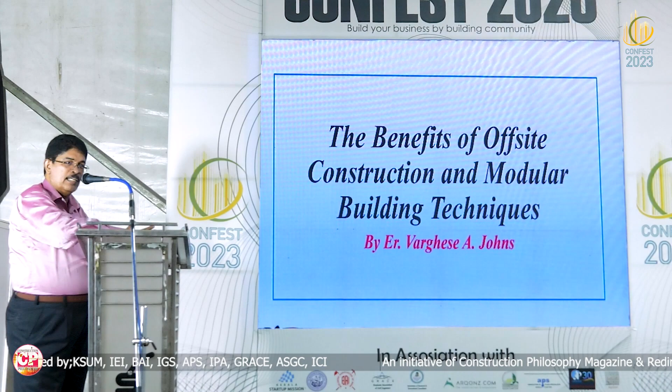Today I am really happy to be here and part of this presentation, this event. The topic I'm going to present is prefab, precast and pre-engineered building, titled the benefits of off-site construction and modular building techniques. We are all aware of the current status of prefab, precast, pre-engineered and modular structures nowadays actually catching up in the market, and it is going to be the future as such.

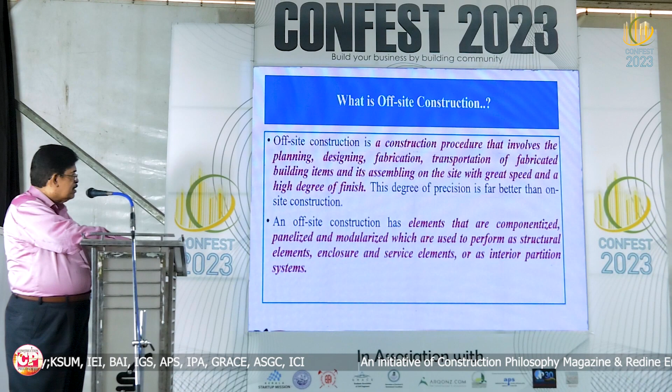So to start with the definition, off-site construction is a construction procedure that involves planning, designing, fabrication, transportation of fabricated building items, and assembling on site with great speed and a high degree of finish. The degree of precision is better than on-site construction. Off-site construction has elements that are componentized, panelized and modularized, which are used to perform as structural elements, enclosure and service elements, or as an interior partition system.

This is basically what all precast, prefab, pre-engineered and modular construction is about nowadays.

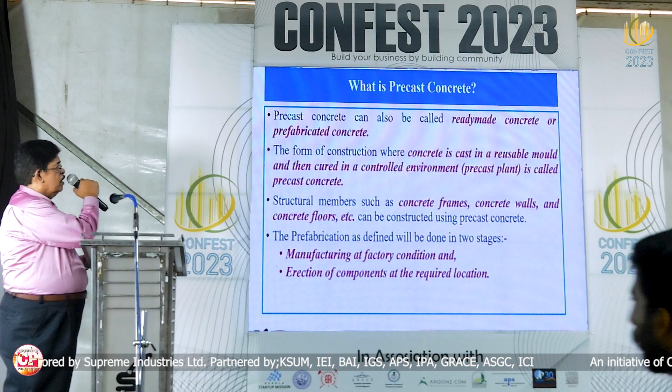So the most important component of this off-site construction is precast concrete. Precast concrete can be called either ready-made concrete or prefabricated concrete. The form of construction is cast in a reusable mold and then cured in a controlled environment. It is called precast concrete because it is a repetitive kind of construction procedure that we do for a large number of buildings or structures or facilities.

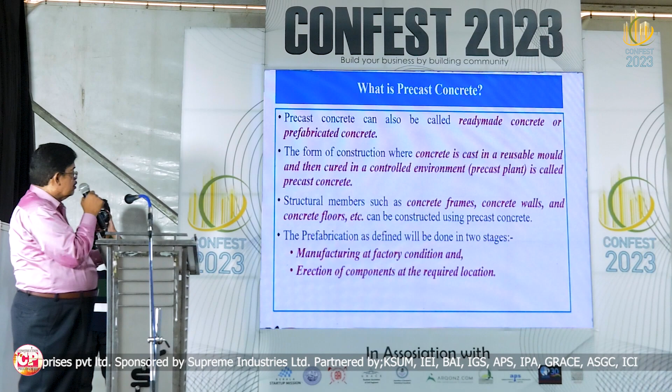Structural members such as concrete frames, concrete walls and concrete floors can be constructed using precast concrete. Prefabrication is defined as done in 2 stages: manufacturing at factory condition, and erection of components at the required location. So we can just have a look at when this precast concrete was actually invented.

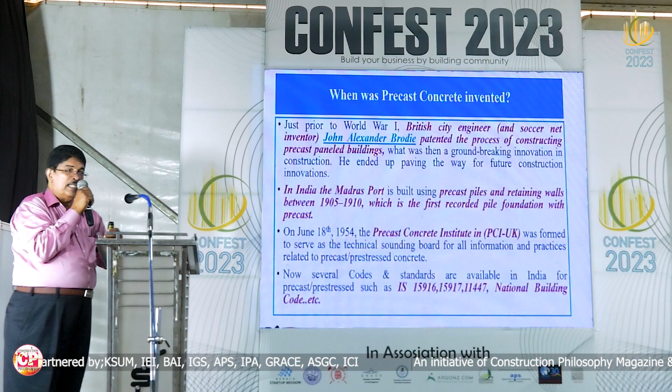It was during World War I. After that, a British city engineer, John Alexander Brodie, patented the process of constructing precast paneling buildings, because war is always actually an initiative to develop engineering and development, because by force we used to have engineering advancement. So they wanted to house the soldiers at the site of the war zones. They had to develop something like a precast building that could be immediately constructed, like what we have sitting here in 2 days - this is constructed and we are housed so fast.

This is the advantage of having a precast or prefab construction methodology.

Then we will go back to the history in India, when it started. The first time, at Madras Port, precast piles and retaining walls were used between 1905 and 1910, which is the first recorded pile foundation with precast in India. During the time of the British, they actually did this Madras Port using precast piles.

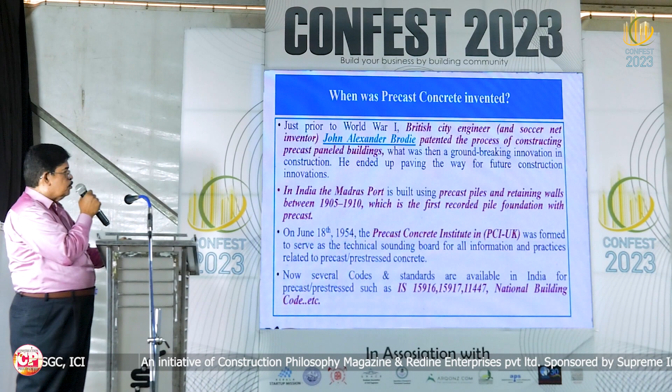Then they formulated the Precast Concrete Institute, PCI UK. Over a period of time, we have also developed precast construction - not that early, but recently we have established precast and pre-stressed codes and standards for design and implementation. You can see codes like IS 15916, 15917, 11447, and the National Building Code of India, which explain and give the requirements for precast construction and design.

What are the applications of precast and prefabricated systems today? It is being used in most projects nowadays, partially or fully. Precast pavements, septic tanks, drainage - this is all what we see daily. Somewhere you will see precast when you go to a construction site or any part of construction.

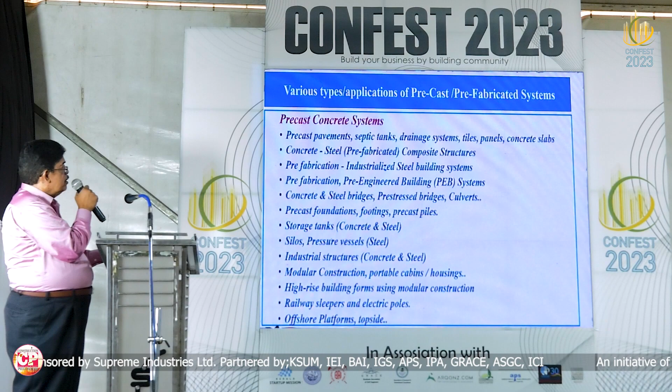Prefabrication, industrial steel buildings, and pre-engineered building PEB systems, steel bridges, pre-stressed bridges, culverts, precast foundations, footings, precast piles, storage tanks in concrete as well as steel, silos, pressure vessels, industrial structures, and so on. Modular construction, portable cabins, high-rise building forms using modular construction, railway sleepers and electric poles, and offshore platforms.

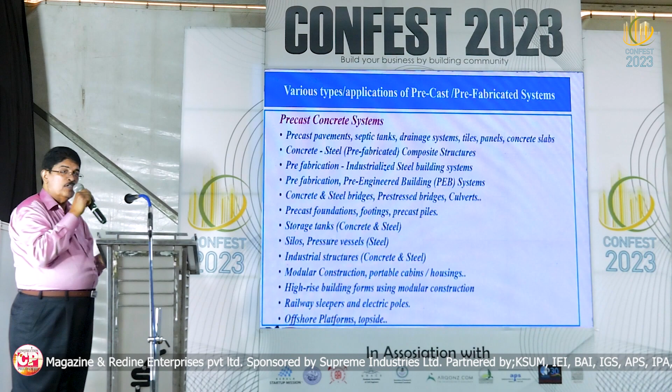Most of these applications are very big projects as well as very essential nowadays, since we need speed in construction and achieving the facility in operation, so we spend less money, more economical and optimized construction. In precast concrete highway and railway bridges, we have I-girders, pre-stressed reinforced concrete, steel plate girders and bridges, pre-stressed concrete segmental construction, pedestrian underpass, vehicle underpass.

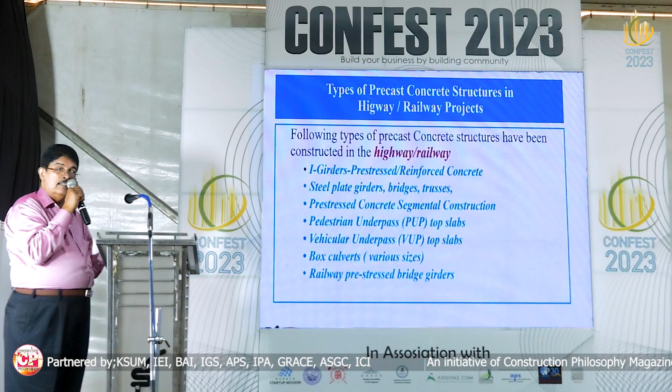This started a long time ago. It reduces time, enables speedy construction, and quality construction also. It is very well managed in a controlled construction or fabrication environment, so you can maintain the quality as much as possible and best.

The India prefabricated building market growth trends - the Indian prefabricated building market is something in the range of USD 2.3 billion in the current year, and is anticipated to register a compound annual growth rate of 13% in the coming years.

The COVID-19 pandemic had caused massive disruption to construction projects all over India. So most construction is actually at a very high pace, picking up to compensate for what was lost and to catch up with the market share they lost. The importance of precast and prefab is becoming more prominent in doing that.

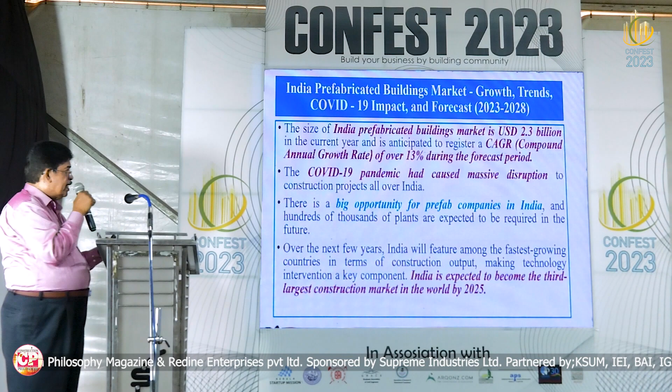So there is a big opportunity for prefab companies in India, and hundreds of thousands of plants are expected to be required in the future. Unfortunately, the state we are in, Kerala, has very few precast or prefab factories. But I think it is going to happen in the coming years, or maybe the need will force them to have something like that.

India is expected to become the third largest construction market in the world by 2025. So this is going to be a very promising business opportunity for precast, or the faster construction, instead of going for the conventional type of engineering or construction.

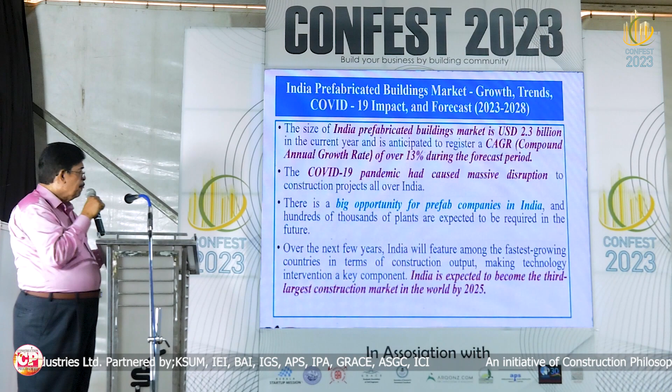India's construction is expected to be US $1.4 trillion in 2025. That is what is actually expected. The urban population will contribute 75% of GDP, up from 63%. 68 cities will have populations over 1 million, up from 42 in 2021. India's construction industry is divided into 250 subsectors, with cross-sectoral connections.

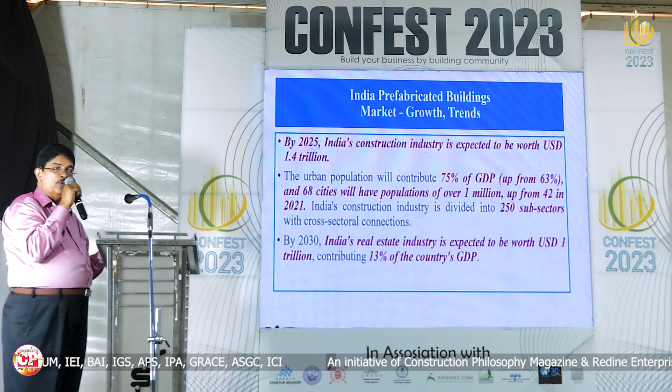In 2030, India's real estate industry is expected to be worth US $1 trillion, contributing 13% of the country's GDP. So the construction industry is going to drive the economy of the country - that's how important this fast methodology of construction is in the coming years.

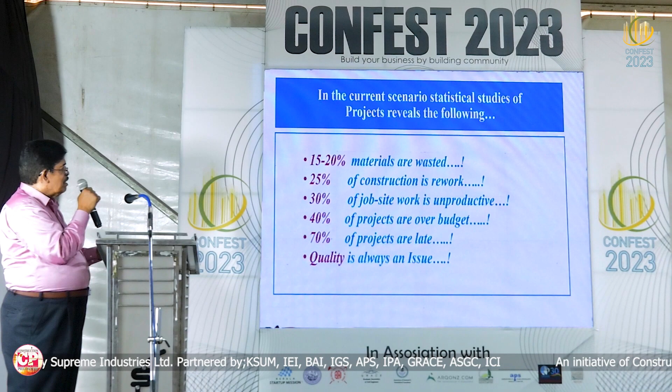We all come from the engineering and construction background. We always say that if you talk to a contractor or anybody, what he actually faces is: 15-20% of materials are wasted, 25% of construction is rework, 30% of job site is unproductive, 40% of projects are over budget, 70% of projects are late. Quality is always an issue. These are the things that are actually happening in reality.

How can you overcome these things when compared to conventional type of construction? This is also another forcing element to go forward with using precast or prefab construction.

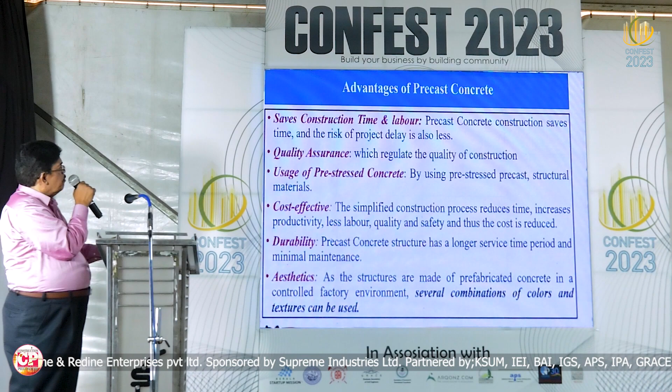So what are the advantages? It saves construction time and labor, provides quality assurance, uses pre-stressed concrete, cost effectiveness, durability, and aesthetics. You can get a very nice finish and color without further painting or surface coating - you can achieve that in the factory itself. The safe construction platform is always done in a controlled environment inside a factory, so you don't have fatal risk involved like in a construction site. Shuttering and scaffolding is not necessary.

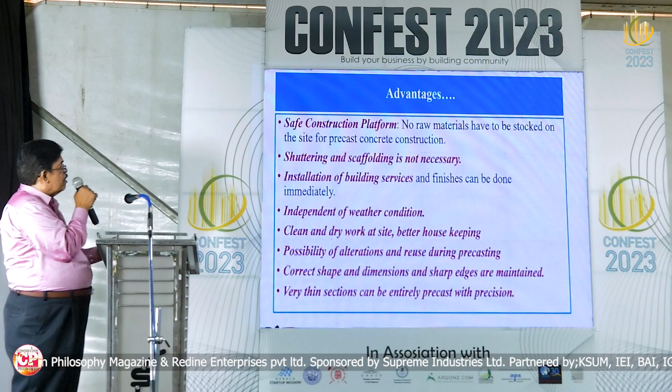This is one of the most expensive elements in a construction site. This can be eliminated or avoided by having a precast construction.

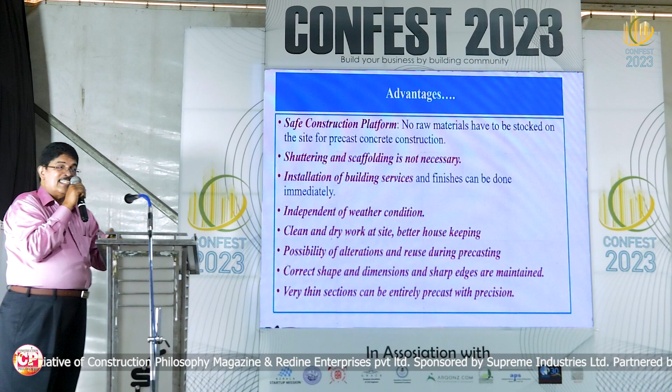Installation of building services is actually pre-designed, that is the only risk or difficulty we have. Everything has to be pre-designed and decided, so that you can put your services also - electrical conduits, holes for plumbing fixtures, and other things have to be designed. You cannot do an on-site correction or modification as easily as in regular construction. That is comparatively fine since we are doing better planning, design, and engineering.

Then, independent of weather conditions, most of the activities are inside a factory. So you don't depend on the monsoon or site problems. What you have is labor agitations - you employ less labor force.

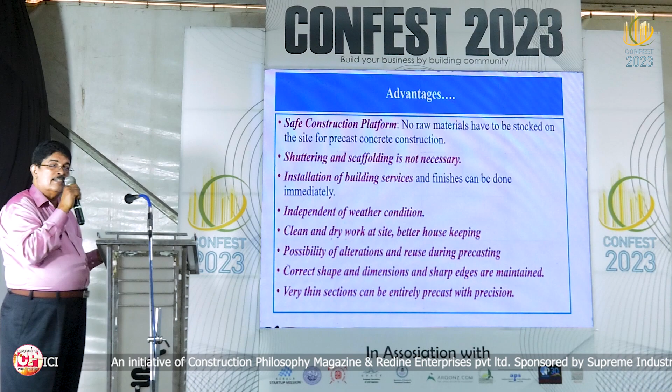Clean and dry work site, better housekeeping, so you don't dump waste. It is a lean kind of construction methodology - waste is not generated as much as in a normal construction site. There's also the possibility of alterations and reuse during precasting, which can be done during changes.

Correct shape and dimensions and sharp edges are maintained because the finishing is comparatively much better - you don't have to do extra plaster. That is also an advantage of a clean and well-molded precast panel or system.

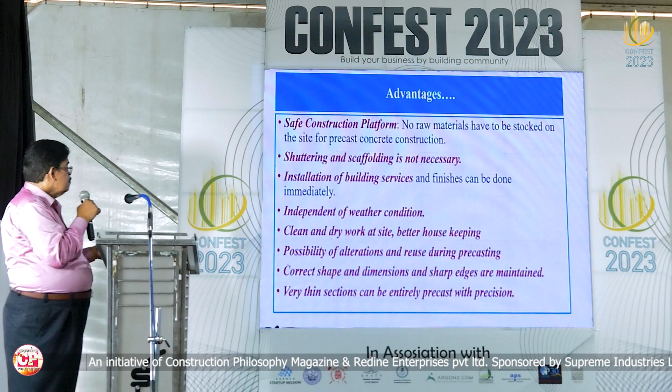High initial investment is what contractors are a little worried about, because to set up this kind of facility, you need initial investment for setting up factories, machineries, skilled laborers, technical people and so on. And you should have continuous business also to continue with this. So that is where the problem arises.

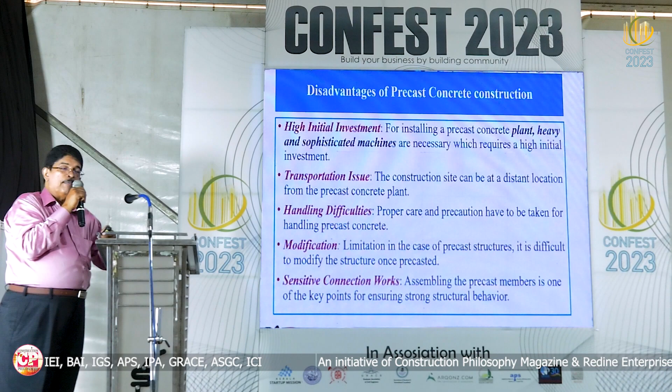But once this methodology becomes applicable or comes into the market in a standard way, or in quantity, this will be overcome, because there will be continuous projects depending on what the factories can actually produce.

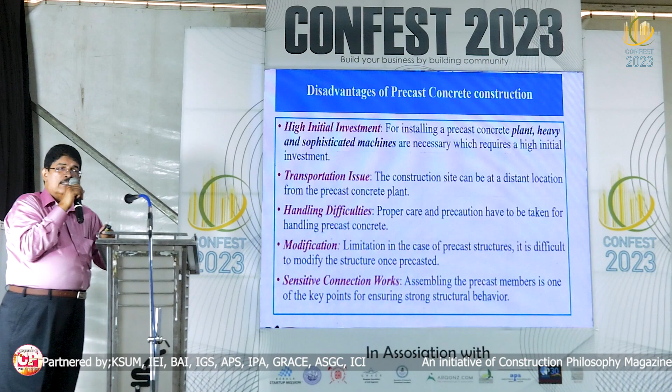Then transportation is another difficult issue because of congested roads. You need to know what size of module you will transport, what trailer you will take. All these kinds of problems always restrict the length of your component to maybe a maximum of 12 meters or less, depending on the situation. And moving through difficult traffic is another biggest issue.

So there are some limitations, but people are moving components up to 18 meters in Cochin at night, with special permission - but not during the daytime.

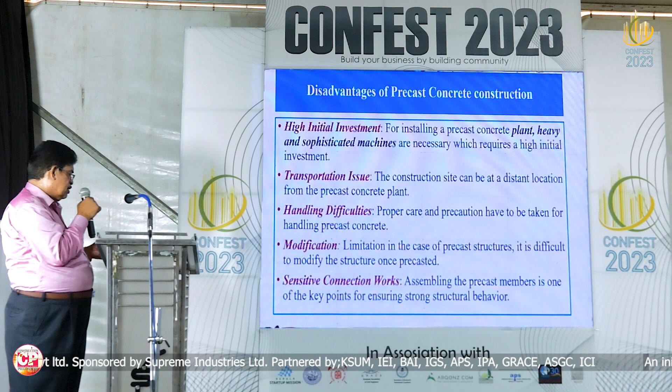Then there are handling difficulties, modification at site is difficult, and sensitive connection works and things like that. So again, handling, transportation, difficulty in connecting precast units, producing monolithic effect - I will talk about that in more detail later. High transport costs, large heavier components, large site yard required for storage, erection equipment like tower and mobile cranes, and skilled labor are also needed.

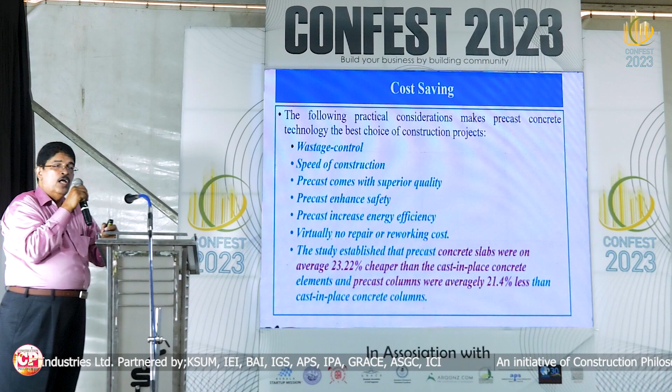So where actually are we going to save cost in doing precast? It's basically on wastage control, because wastage production is minimized to almost nil. Okay, there will be a little, but not like an actual construction site, which creates a lot of construction waste.

And it is very difficult to remove, and health hazards and so many other risks are created that can be avoided. So that is one of the areas.

The speed of construction - maybe one-third or more - can be saved by doing precast construction. Quality is good, precast enhances safety, and there is virtually no repair or reworking cost, unlike what we have seen where more than 30% is rework at site. That doesn't happen with established precast concrete - meaning it's 23, 22 percent cheaper, or some figures like that.

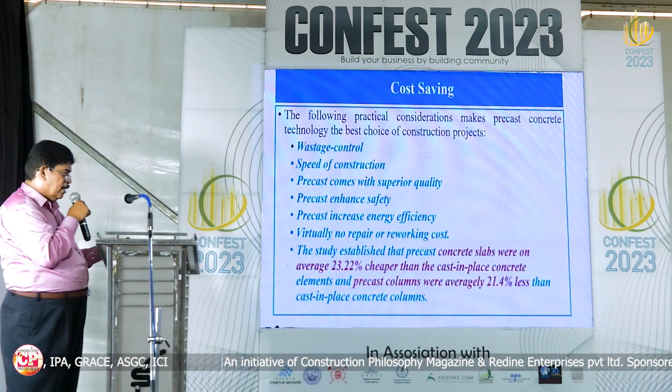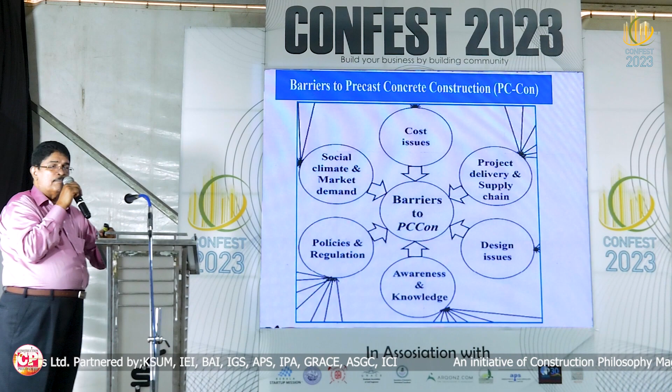And when you want to have a precast construction or project, there are some barriers to precast concrete construction - project delivery and supply chain, how you get your materials, what are the requirements, how sequentially, like I said, just in time. All these things we have to apply and get the materials on site for a fast kind of construction as per the sequence of construction.

And then design issues, awareness and knowledge, policies and regulation, and social climate and market demand. These are some of the factors, I'm not going into detail because of the time constraint.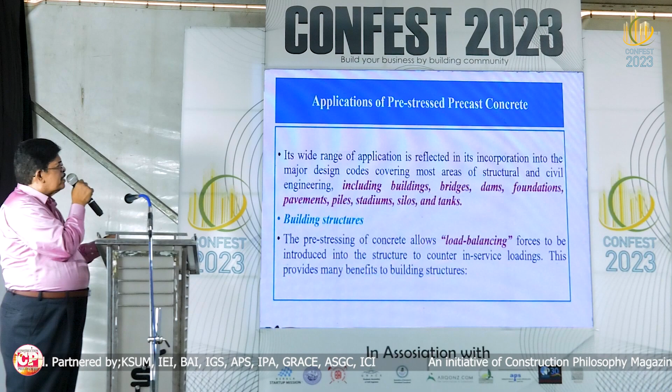So the applications of pre-stressed precast concrete - this is one of the main advantages. Mostly L&T and others are doing a lot of pre-stressed girders. The advantage is you do it in a yard and then bring it to the site and install it. There are a lot of advantages for building structures there, load balancing and all. You come up with smaller sections if you do pre-stressing. So larger spans, reduced structural thickness, faster stripping time, reduced material cost, things of this kind.

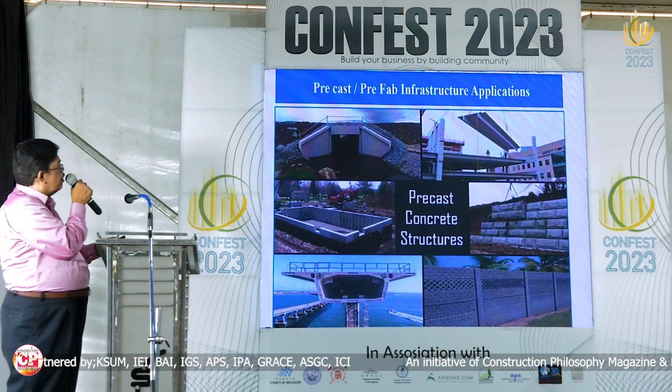Now look at where the applications of most precast are - like culverts, building slabs, reservoirs or swimming pools, retaining structures and bridges, box culverts, and things like fencing.

Normally now we can see in most cities, the metro projects are actually mostly box girders. These are all precast things. This is how fast we are constructing these metros because of these facilities being available.

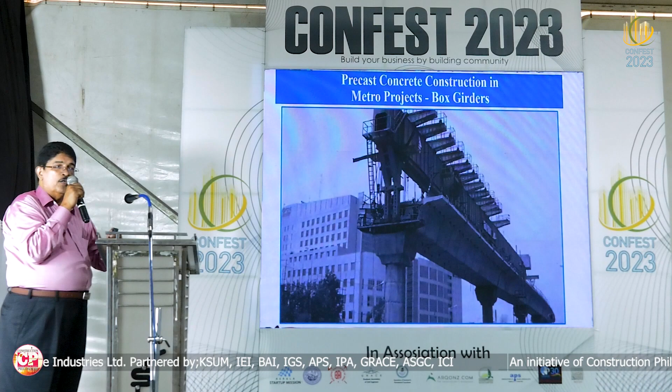Using these heavy cranes, everything is actually done in no time - kilometers, you do it in one day. So this is the concrete girder beam system that we have in KMRL, not the box girders.

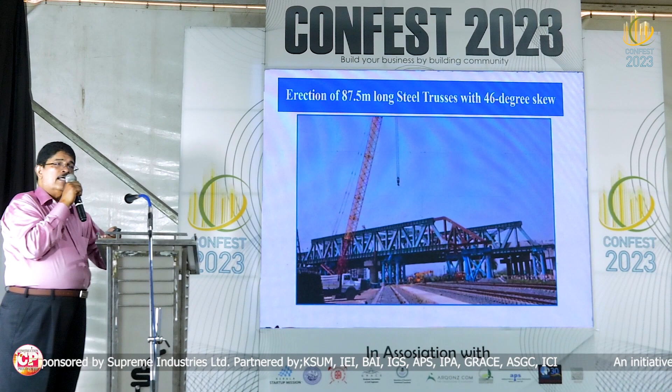So like this precast segmental construction, this is just a picture of that. And then precast or prefabricated steel trusses - these are all fast constructions. You know how long it would take to build a bridge like this in a normal way. So you fabricate all these things at the yard with the design, fast fabricate it, bring it and install it. It becomes operational in no time.

So this is basically the public's projects, or maybe the services that people can enjoy. Not like earlier days when we took months and years to build a bridge - that time is over because of the precast and prefabrication systems available now.

And this is another thing in oil and gas energies. Most of the structure seen - the jacket as well as the top side - everything is precast or prefabricated in a yard, and then brought to the offshore site and put together and built. So this is huge construction that is actually happening in precast, or this is prefabrication.

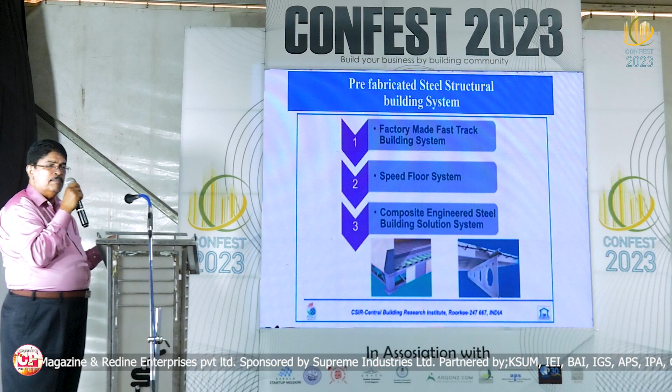So then we come to prefabricated steel structural building systems. Now there are a lot of high-rise buildings being constructed using steel structures, which is slowly picking up.

But elsewhere outside India, mostly if you go to the Middle East and places like that, composite structures are in place maximum. So it reduces the space, enables faster construction, and prefabrication is actually being done.

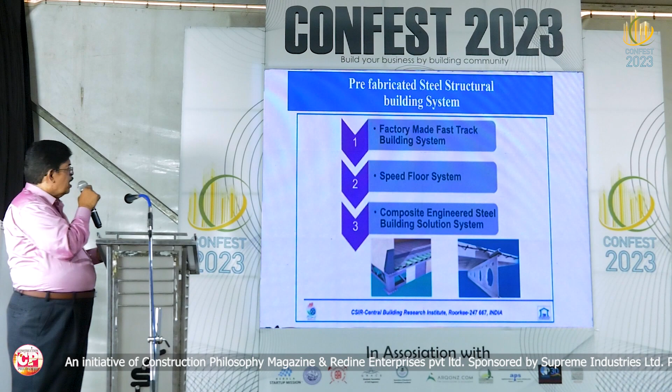Also the composite floor systems, steel building solutions, and things like that. The Central Building Research Institute is actually preparing this kind of innovative studies as well as recommending them.

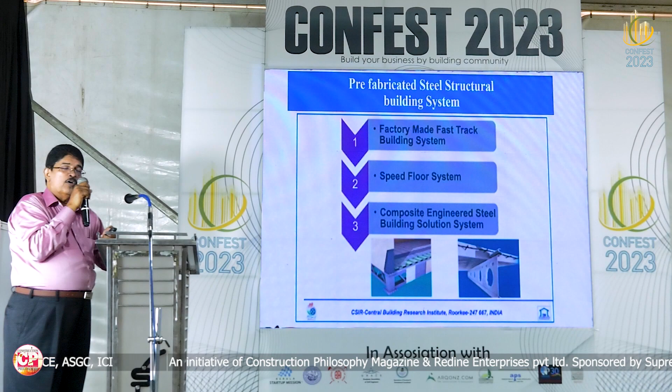Even the Transport Ministry has been encouraging this by issuing advisories or orders to use more than 40% precast elements in their construction sequence. So the government is actually encouraging this, and we also have to do it in the private sector as well, so that fast construction can be done.

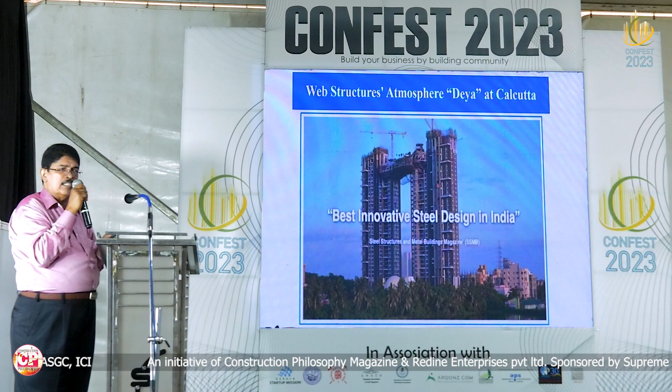Those coming from Calcutta may have seen this building, a best innovative steel design. The entire thing is actually a steel structure, built in Calcutta, with the consultant from Singapore. This won one of the best awards for building structures 3 years ago.

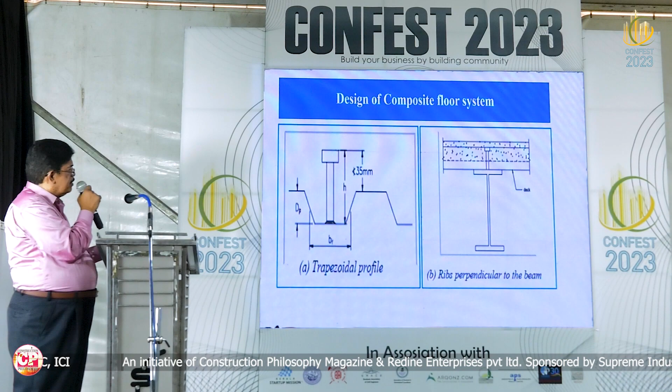So this is a design of composite floor system, how you put your decks and shear studs in composite section, which reduces your thickness of the slab system. If you go for a concrete beam, it will be much deeper, maybe up to 1 meter deep, and it will take a lot of space, and sometimes you don't have space for crossing your services like AC ducts or pipes, because you lose that space. Suppose you are building a 20-story building and you lose 1 meter per floor, you're deemed to be losing 20 meters of space. So you can reduce that by using this composite floor system.

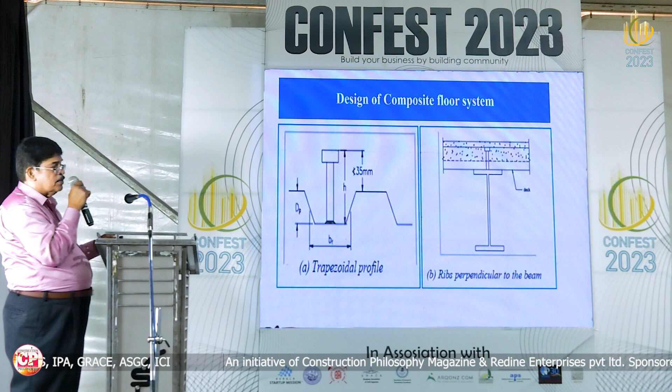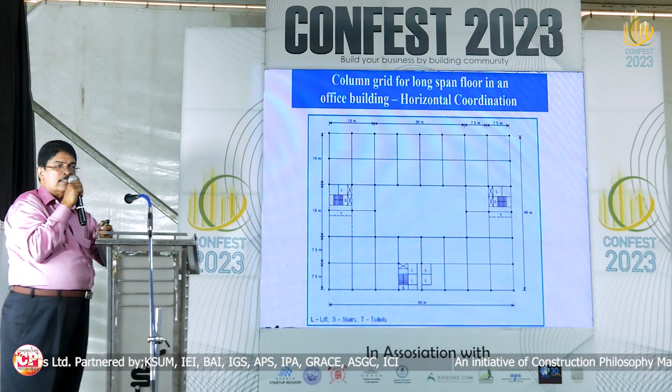So this is also another steel building, because you can have very large spans. If you build a steel building, your column locations are maybe 10 meters, 15 meters and things like that, and nowadays you get hollow core slabs spanning up to 20 meters. So you don't have much interference in space utilization if you use this.

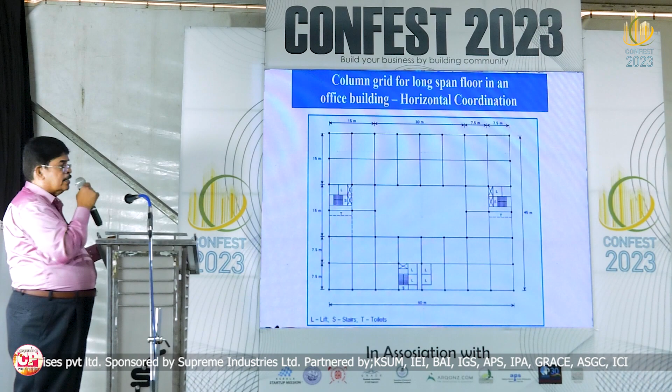This is actually in Europe, people use this technology, and most of the buildings are done with steel structures, so that they don't have frequent columns and other things, unlike buildings like what we construct here. So this is one of the best advantages of having steel structures, prefabricated steel structures.

So you can see that 9 to 10 meters in span, and you put 6 to 9 meters of precast or hollow core slabs. So you don't have much of an interference. You can have a large span building system.

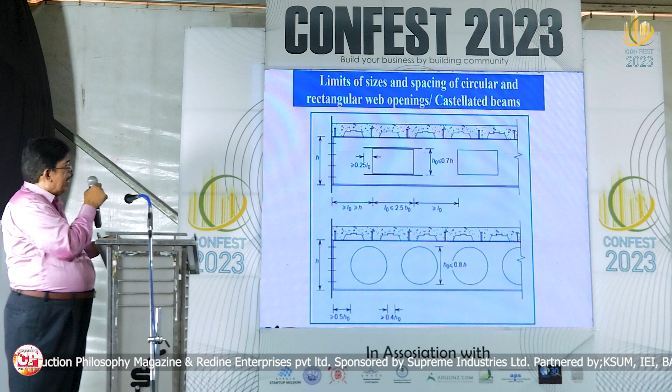This is also another way you can do it - the steel beams can be cut open for passing your services. These are castellated beams, also available nowadays, so you can pass through all your things. So you reduce your waste space between the two floors, and it will be more - your supports are also, maybe these beams can support your services as well. So there is a lot of advantages by doing structure, floor systems and things like that.

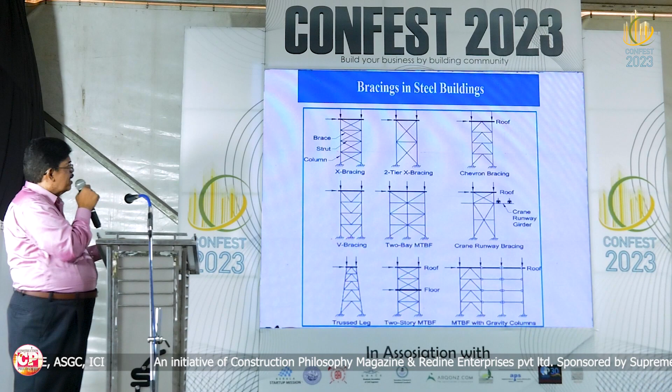So this is something - a comparative study of RCC, steel and composite. What is the size of RCC that you reduce in steel and composite? How much space can you save by doing this type of construction? So this is a comparative study actually conducted by some thesis or somewhere.

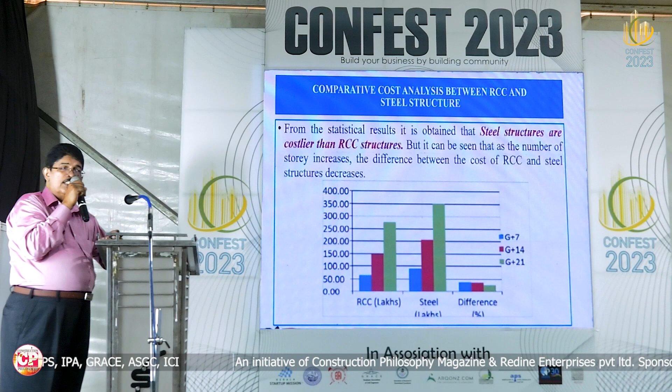So this is a cost evaluation, how actually the difference works. Of course, the steel structure is costlier than RCC in the beginning. But in some ways, the biggest advantage is that you can finish the job maybe in 50% of the time. So your revenue starts coming maybe much earlier than expected, and you get a much faster quality product as well.

So now we come to one of the types of structure which is getting popular in our country, and that is PEB - pre-engineered buildings. So I know that most of the warehouses, storage, stores and other things, and even buildings, have started doing pre-engineered building systems. What they actually do is fabricate the sections from plates.

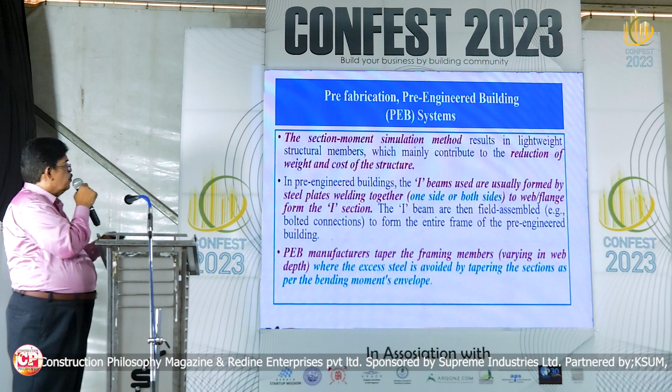They weld the web to the flange, either on both sides or sometimes on one side - that is one risk there which people don't look into much detail. And they taper the frames. You can see the section sizes vary from the eave to the bottom because of the envelope of bending moment - they cut and save material there. That's how they do it.

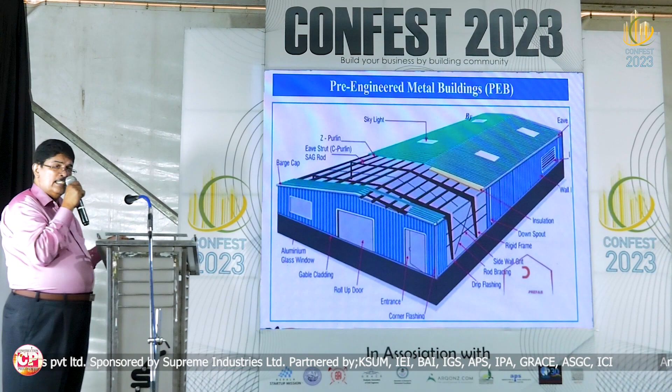So this shows the various components of a pre-engineered building system. You can see that the erection can be done - all the items are prefabricated from a factory and then brought in, say within a month, or maybe the foundations are ready within a month, they can finish the warehouse or storage yard.

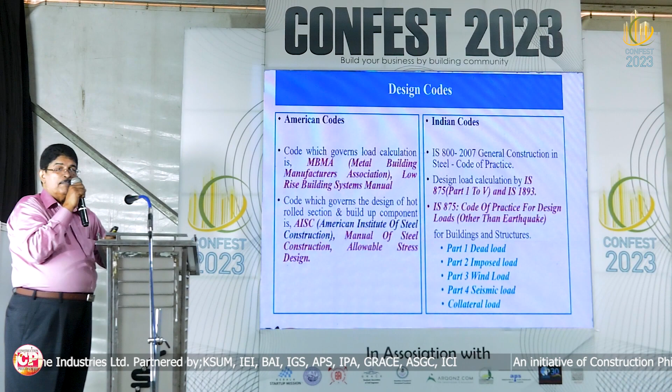So these are the codes, the American code, most PEB companies use American code here. They use a manual called MBMA, that is Metal Building Manufacturers Association. That's not a code, it's only a small guideline manual. The loads, live loads and other things recommended by IS 875 are not in line with this. They use a very low live load, wind load and things like that. Sometimes it's not acceptable to match with the Indian standard. That's why in PEB we don't have a code yet in IS.

So we try to use IS 800 2007, but it is a little conservative because it is for heavy structural steel, not for light structural steel.

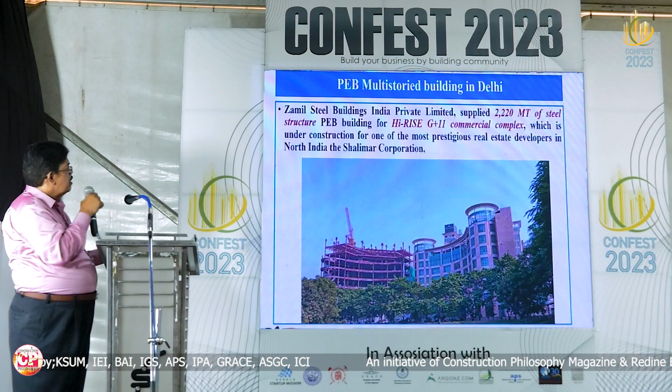So you can see that Zamil Steel is one of the PEB builders. They have done a high-rise building, G+11 commercial complex in New Delhi. The applications are industrial buildings, indoor stadiums, parking lots, railway stations, and so many places they use PEB frames. So they can do very large span buildings up to 40 meters, 50 meters and things like that - metro stations, warehouses, high-rise buildings.

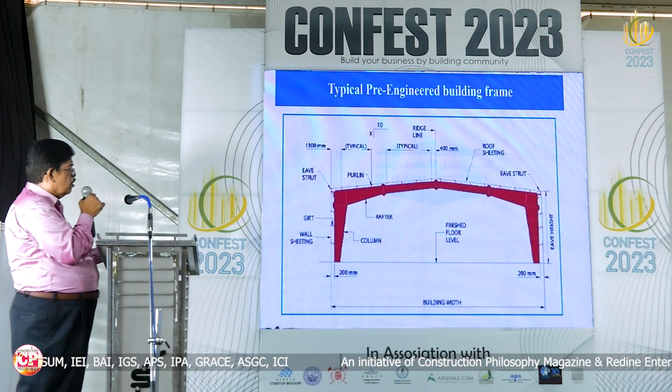So this is actually the way they fabricate pre-engineered building, the tapered sections based on the bending moment envelope. They cut and save a lot of material.

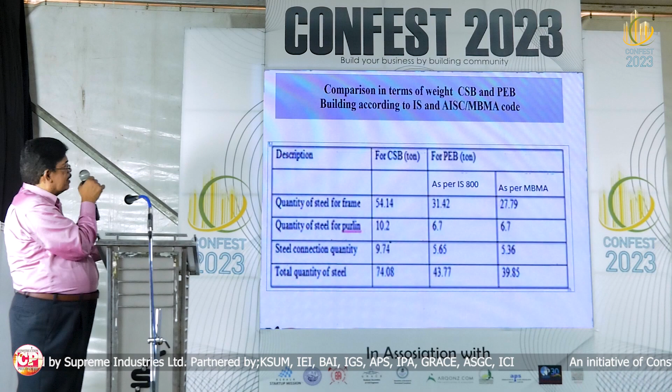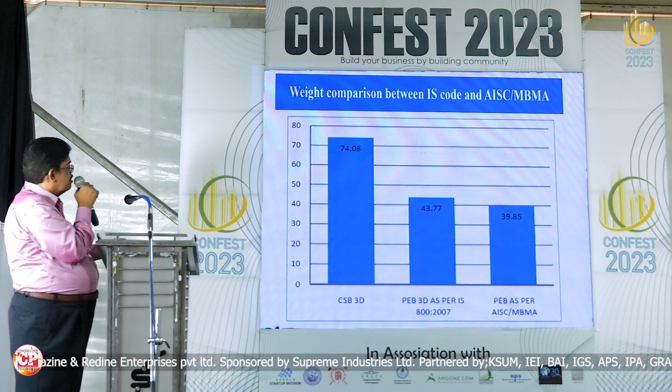This is also another weight calculation for standard conventional steel and PEB, as per IS 800 and as per MBMA, showing how much difference comes in the steel weight. But I won't say it's a huge saving, we have to make sure it is safely designed. Safety is one of the important things - whatever code we use, the designer has to be sure that what they are designing is safe. So this is the cost weight comparison of the steel.

This is again cost. Okay, now let us talk about prefab and precast technology when it comes to concrete.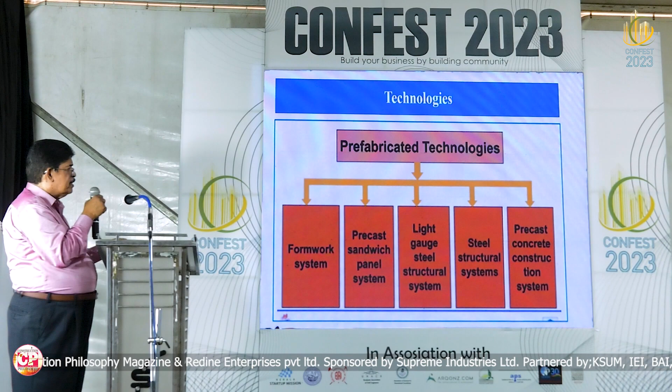Prefab technology is eco-friendly, sustainable, time and cost saving, with better quality control and proper strength. These are the elements governing why prefab technology is catching up. So the technologies are formwork system, precast sandwich panel system, light gauge steel structural system, steel structural system, precast concrete construction system - different types of prefabrication technologies implemented.

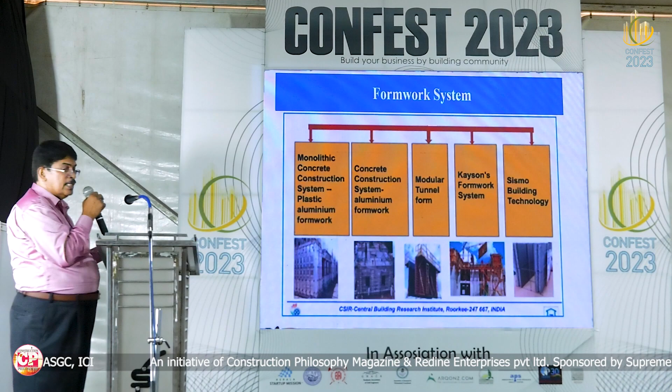And in the formwork system, there are different types of formworks: monolithic concrete construction system, aluminium formwork, modular tunnel form, Kayson's formwork system, and Sismo building technology. These are all recommended by CSIR, which recommends these systems that can be implemented in precast or prefabrication.

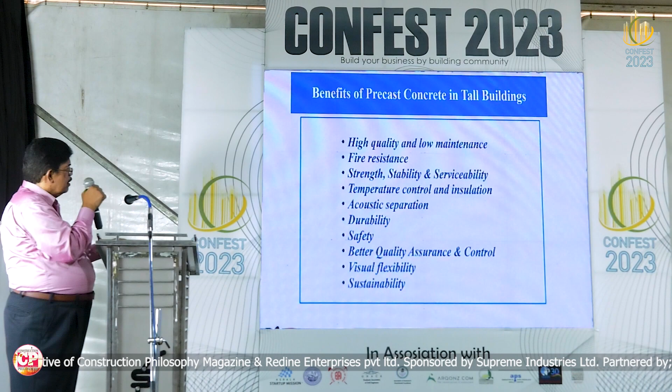So the benefits of precast - there are a lot of benefits: high quality, fire resistance, strength, and so on. There are so many advantages in doing it, and benefits too. These are all different types of components of a precast.

So this is how it is actually. They are giving me a notice that I should cut short and do it. So let me jump. So these are all different things.

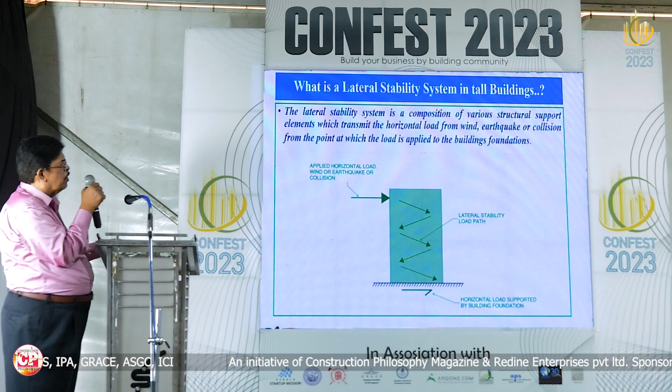I just wanted to say something about the stability of the tall building system, how it is actually achieved in precast building. This is the most challenging thing in designing a precast high-rise building, because the most important thing is the connection design. So we have to finalize corner columns or maybe facade columns.

So how many minutes more are you giving me? Finished? 10 minutes? Okay, so I have to conclude here.

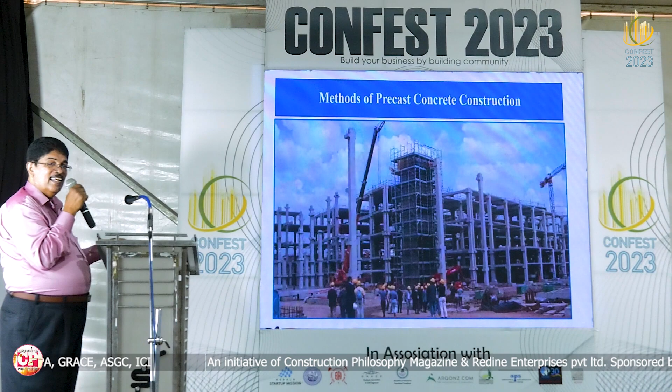These are all different types of this system. I will just pass through all because the subject topic is so big, you cannot just touch the entire thing. People are building all types of these precast, prefab building systems. This is one of the buildings, Instacon, Mohali, which they erected in 48 hours as a precast building.

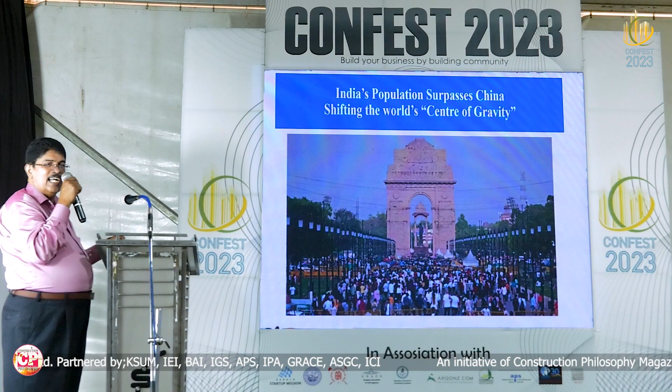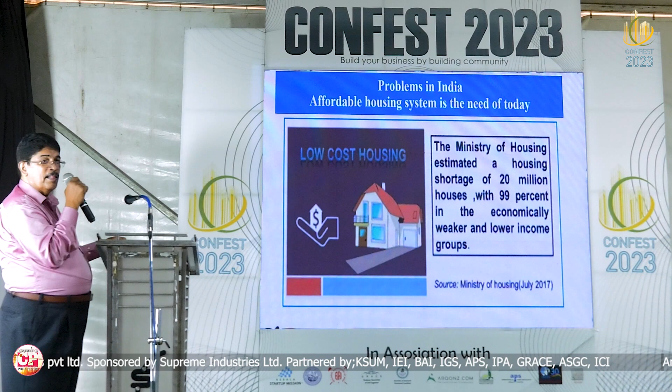So what we will do about this problem is low cost housing. That is the only solution for this. And the Government of India has actually developed so many yojanas, like the Pradhan Mantri Yojana and all those things, which is mainly capped for precast. And now, Hindustan Prefab Limited, Government of India, was started in India a long time ago.

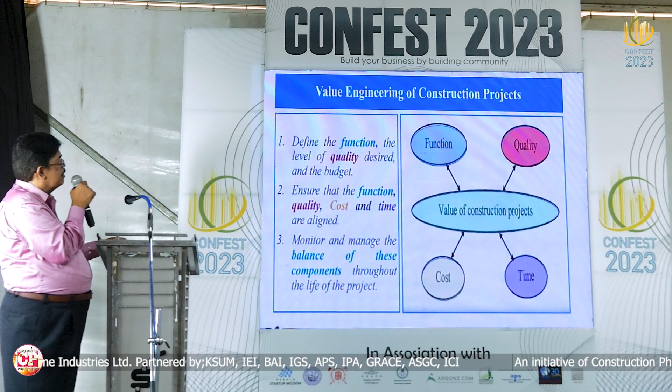So this is some kind of a way construction projects can be made more efficient, faster or cheaper by doing project management techniques, value engineering, then constructability, logistics at site, then implementation of BIM, adoption of BIM technology in construction management. So that is what BIM is, and there are 8 dimensions of BIM, 1 to 8.

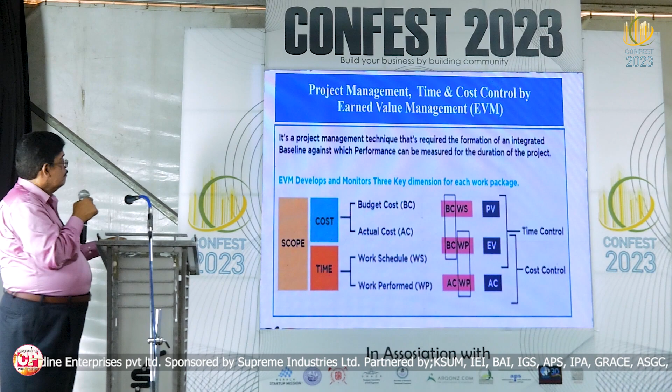And now BIM is going to be outdated very soon. It is going to be replaced with integrated collaboration platforms. That is one more step ahead. So then earned value management, these are all time and cost control in project management, and the use of artificial intelligence in construction management, that also has been introduced nowadays.

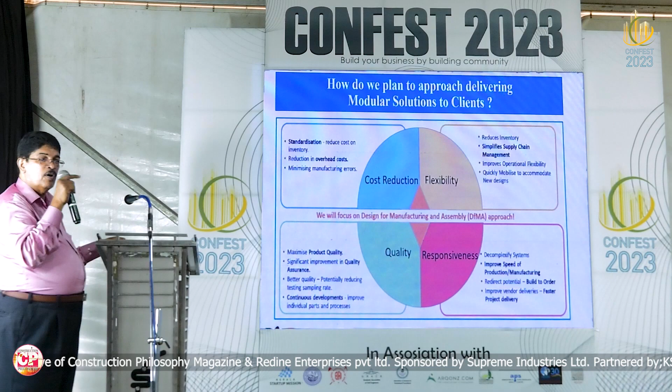Then we didn't talk about modular construction. This is the last point of the presentation. Modular is actually complete fabrication of your module as an apartment or maybe a house, and then you take it to the site and install it. So this is the modern modular design concept. The size and other things are decided based on the transportation.

Then you design your modular system, construct it and design it, then modeling, and then bracing system. These are all LGSFS buildings constructed.

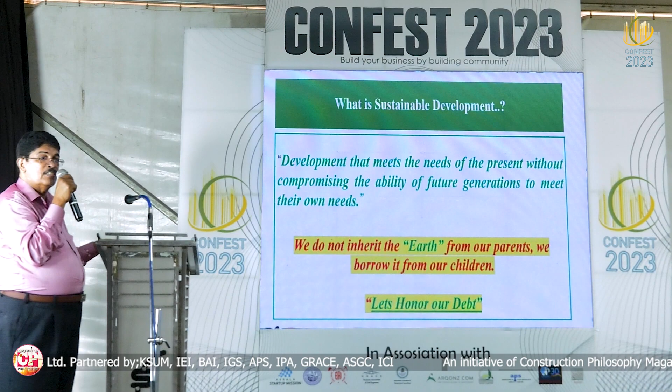It is very important to bring sustainability into precast. How much sustainable it is going to be - precast construction is considered very sustainable. Development that meets the needs of the present without compromising the ability of future generations to meet their own needs. We do not inherit the earth from our parents, we borrow it from our children. Because we are borrowing everything that is reserved for them, we are stealing. So let us honor the debt.

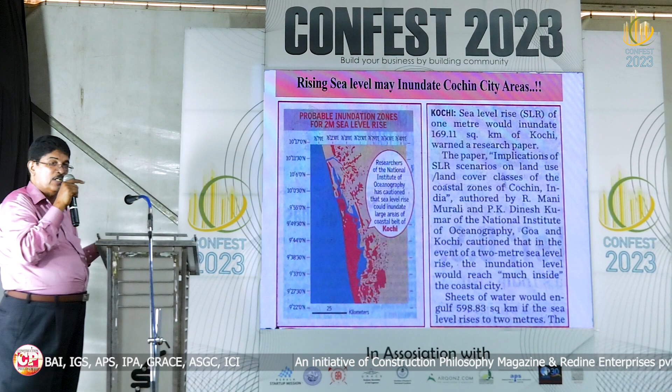So these are all points required for buildings. This is actually net zero construction. Then global warming - this is one point which I would like to say. Because of global warming, there was a study conducted by the National Institute of Oceanography. They found that if the water level increases in Cochin in the coming years, something in the range of 598 square kilometers of sea level, the area of Cochin will be underwater. So this is a very alarming situation.

Then what can civil engineering do for this? What I would like to conclude with: we are the first generation to feel the sting of climate change, and we are the last generation that can do something about it. Because this is associated with prefab and other things, more than 25 to 40% of carbon emissions can be controlled by doing prefab and precast.